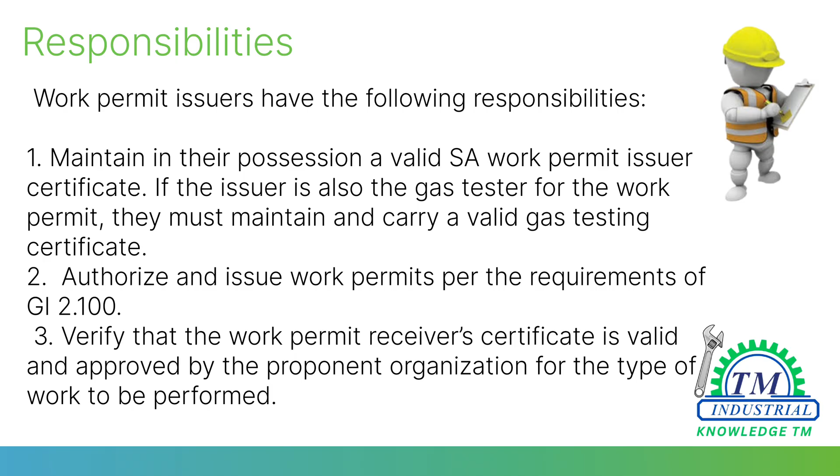Verify that gas tests are conducted for combustible atmospheres, toxic atmospheres, hydrogen sulfide, oxygen concentration, and additional air contaminants, as required. Verify the gas test results have been entered on the respective work permit, and the gas tester has signed the corresponding gas testing section.

Ensure that the joint site inspection, including completion of the hazard analysis checklist, has been conducted with the receiver. Analyze any hazards listed in the hazard analysis checklist that are not sufficiently addressed, i.e., answered no, and develop methods to adequately control the hazards.

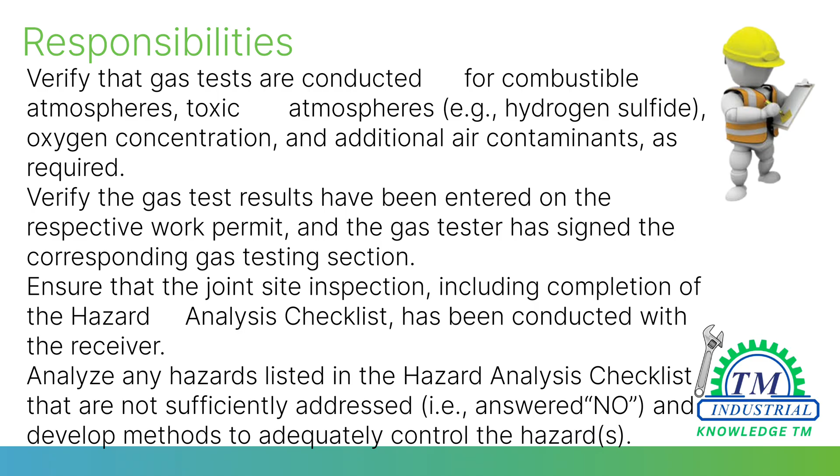Work permit receivers. A work permit receiver is a Saudi Aramco employee, including proponent organization employees, who has been certified by their division or department head, or a contractor employee sponsored by the SA organization head that has contractual authority over the contractor to sign and receive work permits. Work permit receivers have the following responsibilities.

1. Maintain in their possession a valid Saudi Aramco Work Permit Receiver Certificate. 2. Receive the proper work permits from a Saudi Aramco certified issuer before executing any job. 3. Participate in the joint site inspection, including the hazard analysis with the issuer or designated representative. 4. Perform the work in accordance with the conditions and requirements agreed upon and specified on the work permit.

5. Remain at the job site and monitor the work to make sure all work permit conditions and applicable Saudi Aramco safety and health requirements are being met. Keep a copy of the signed work permit in his possession or in view at the job site for the duration of the job, so that it is available for inspection and cancellation if necessary.

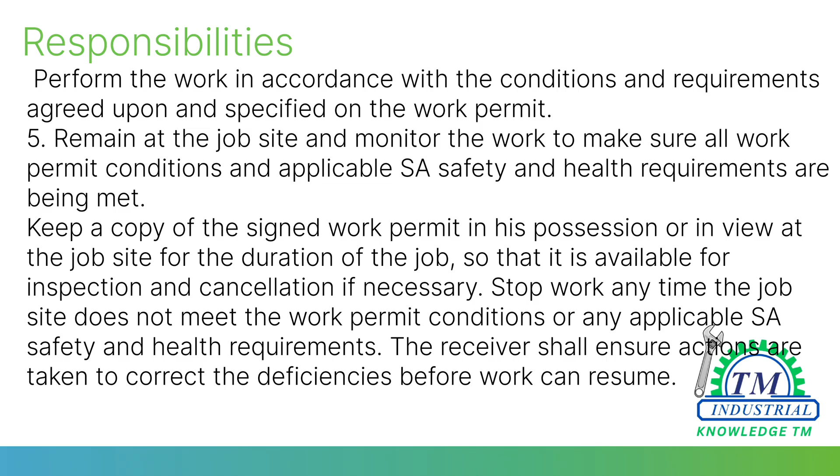Stop work anytime the job site does not meet the work permit conditions or any applicable Saudi Aramco safety and health requirements. The receiver shall ensure actions are taken to correct the deficiencies before work can resume. Immediately stop work if a change occurs in the work activities or site conditions, and inform the work permit issuer.

Participate in the joint site inspection with the issuer or designated representative to verify that the work area has been left in a safe and secure condition before the work permit is closed. Close work permits after completion of the job or when the permit duration has expired.

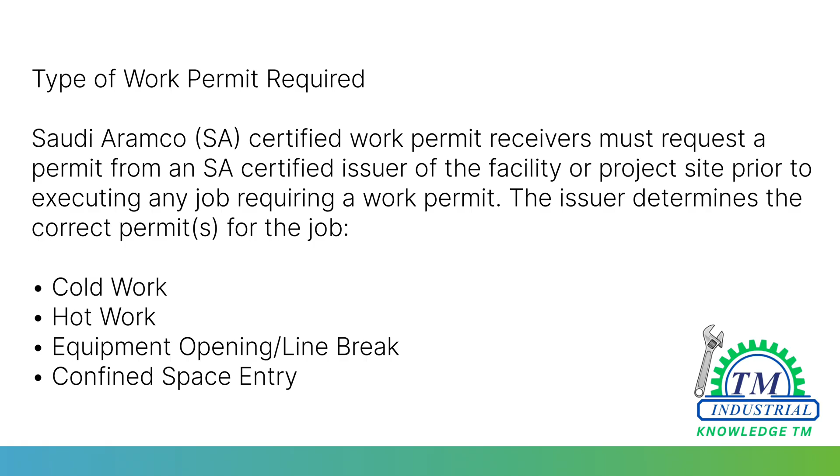Type of work permit required. Saudi Aramco certified work permit receivers must request a permit from a Saudi Aramco certified issuer of the facility or project site prior to executing any job requiring a work permit. The issuer determines the correct permits for the job: cold work, hot work, equipment opening, line break, confined space entry.

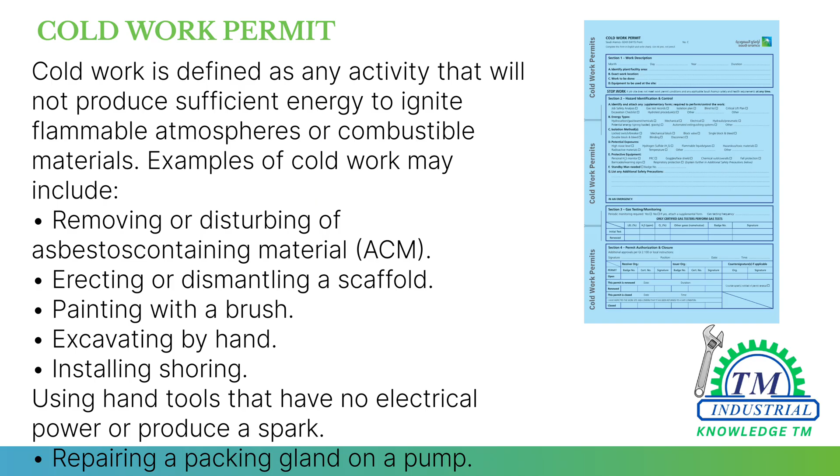Cold work is defined as any activity that will not produce sufficient energy to ignite flammable atmospheres or combustible materials. Examples of cold work may include removing or disturbing asbestos-containing material, ACM, erecting or dismantling a scaffold, painting with a brush, excavating by hand, installing shoring, using hand tools that have no electrical power or produce a spark, repairing a packing gland on a pump.

Hot work permits. Hot work is defined as any activity that may develop sparks, flames, or heat sufficient to cause ignition. Examples of hot work include using open flames, welding, or torch cutting, spark-producing tools or equipment, abrasive blasting, internal combustion engines in restricted areas, work on or in close proximity to live electrical apparatus, devices not rated for the electrical classification of the area.

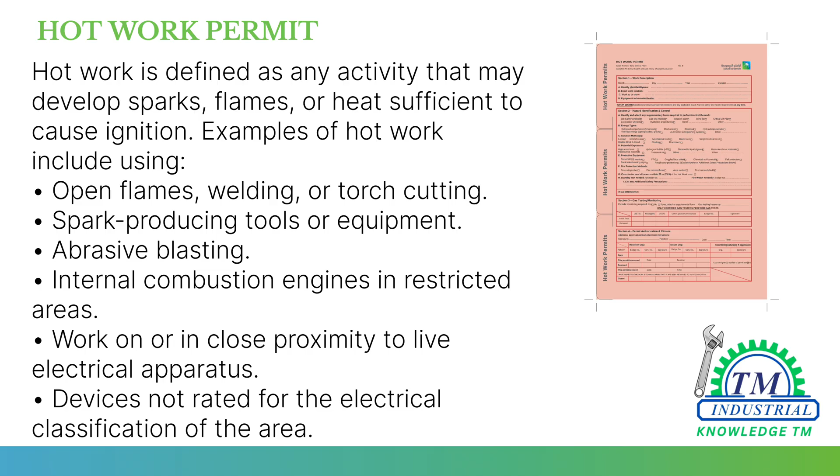When work permits are required, hot work permits control work activities that may produce enough energy to ignite flammable atmospheres or combustible materials. When performing hot work in hydrocarbon facilities, all sewers and drains within 23 meters, 75 ft, of the ignition source must be covered or water sealed to prevent the escape of flammable combustible vapors or gases.

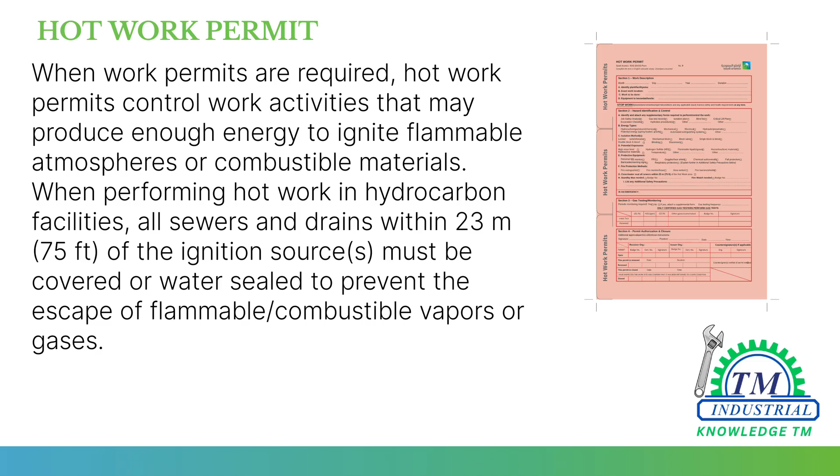Equipment opening, line break permits. Equipment opening, line break, is defined as any activity associated with the initial opening of equipment, vessels, or piping that is part of a closed system and contains, or has the potential to contain, flammable, combustible, toxic, or injurious materials, high-pressure steam.

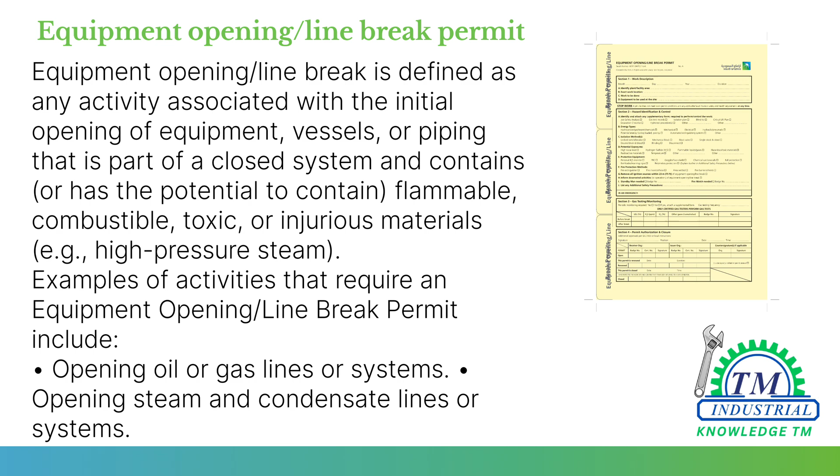Examples of activities that require an equipment opening, line break permit include opening oil or gas lines or systems, opening steam and condensate lines or systems, opening lines or systems containing H2S, opening lines or systems containing nitrogen, N2, opening lines or systems containing a hazardous material, e.g., caustic or sulfuric acid.

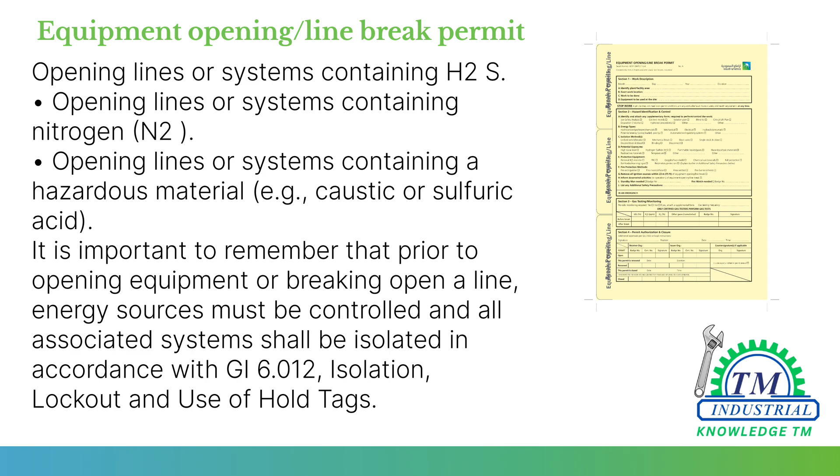It is important to remember that prior to opening equipment or breaking open a line, energy sources must be controlled, and all associated systems shall be isolated in accordance with GI 6.012, isolation, lockout, and use of hold tags.

Confined space entry permits. Confined space entry is defined as the entrance of any part of the body into a space that meets the criteria for a confined space. Entry includes all periods of time when the confined space is occupied. A confined space is any space that has limited or restricted means of entry or exit, is not designed for human occupancy, contains or has the potential to contain a hazardous atmosphere, contains any other recognized serious safety or health hazards.

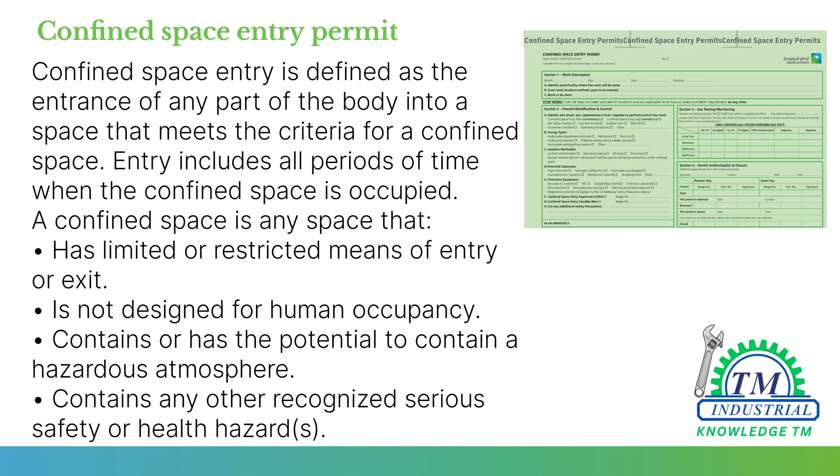Examples of confined spaces include tanks, vessels, vessel skirts, vaults, manholes, sewers, valve boxes, lift stations, and structures or excavations 1.2 meters, 4 ft, deep or deeper. Areas above floating roof tanks where the top of the roof is more than 1.2 meters, 4 ft, below the rim of the tank are also considered confined spaces.

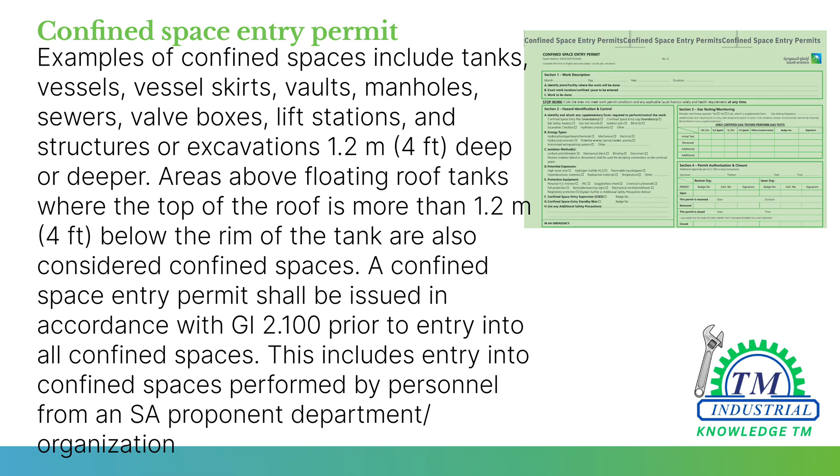A confined space entry permit shall be issued in accordance with GI 2.100 prior to entry into all confined spaces. This includes entry into confined spaces performed by personnel from an SA proponent department, organization, plant operations.